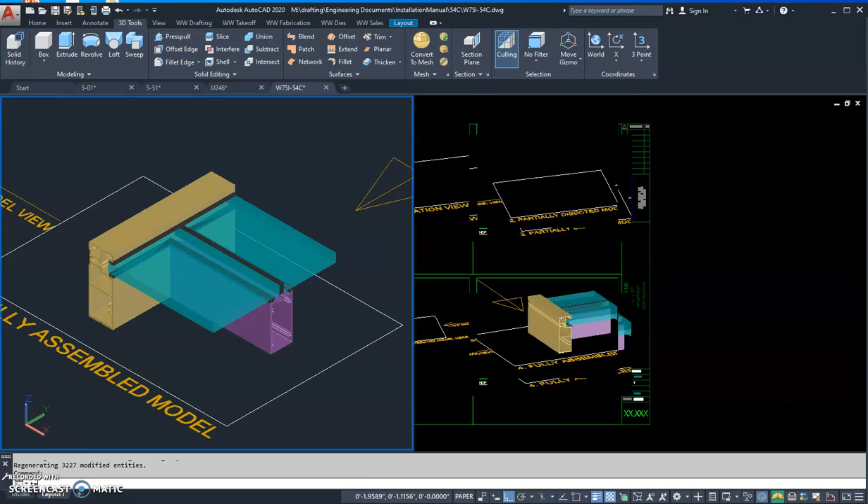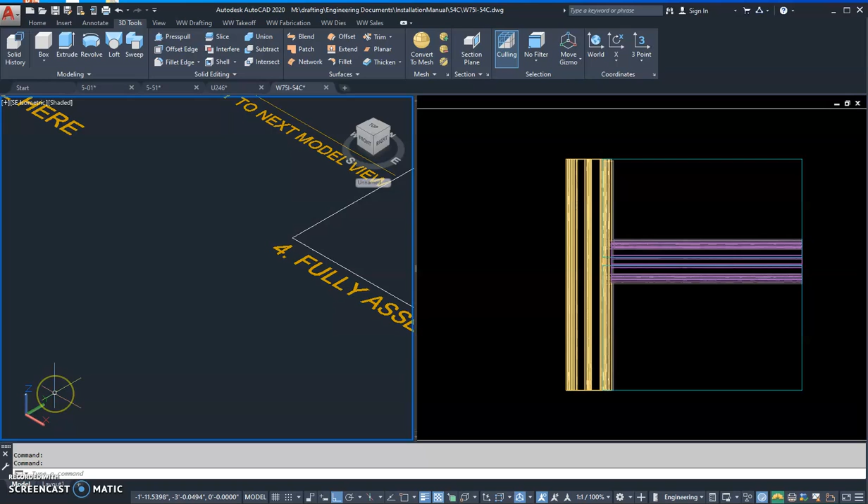Okay, so now we're going to go back to model space and start literally dissecting or taking apart this model piece by piece to show the different steps in the different viewports. So to do that, in the template we have a nice little reminder here to simply make sure your UCS is in the viewport plan, VPP setting. That makes it the easiest.

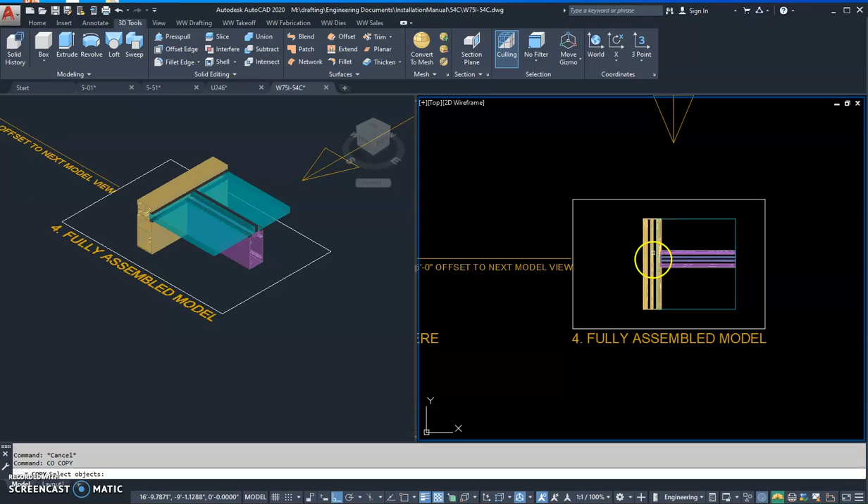And you're going to be doing 5-foot offsets to the next model. So that's our little trigger. So you could either copy from this isometric view or in the 2D view. I'm going to do it from the 2D view. I'm just going to copy everything we got here and make sure ortho is on, and I'm going to copy it over 5 feet. Okay, now I'm going to start working in this model here and start dissecting.

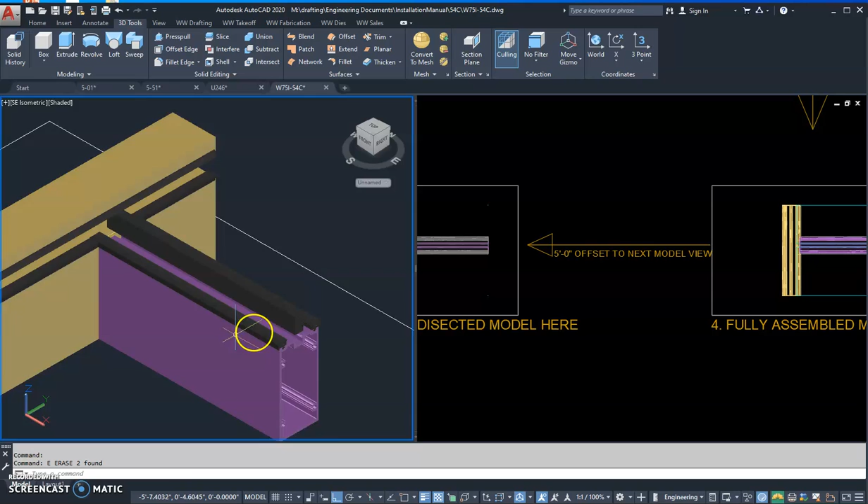So what were the last things that went in? Well, it was the glass. So we're going to remove the glass, and without the glass, we can't seal. So we're going to take off the sealant.

Okay, so this would be that second view. So you have to think to yourself, what am I showing here? What's the value of this view? Well, now you can see the logic of the gaskets, and we'll have to show the sealant work that needs to happen there. Okay, so now we have the second view.

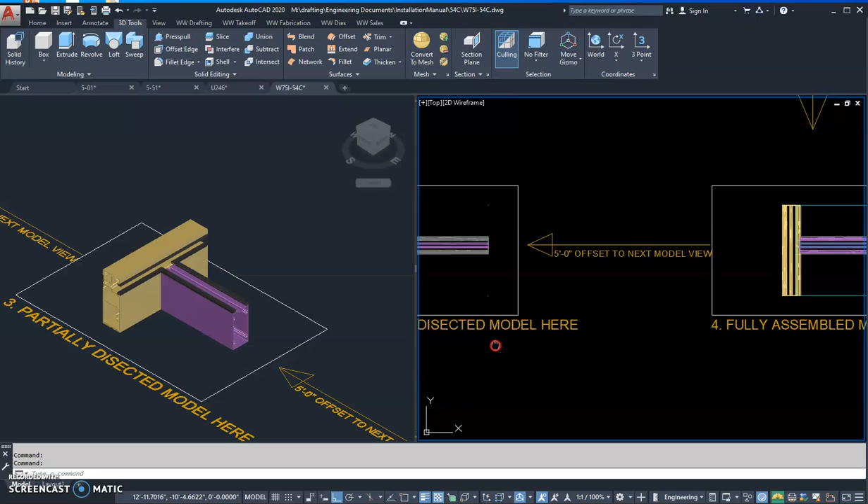We're going to copy this model again. So we're going to take a copy. Again, ortho on, 5 feet, go to the next view. And now we'll work in model number 2, and we're going to dissect some more.

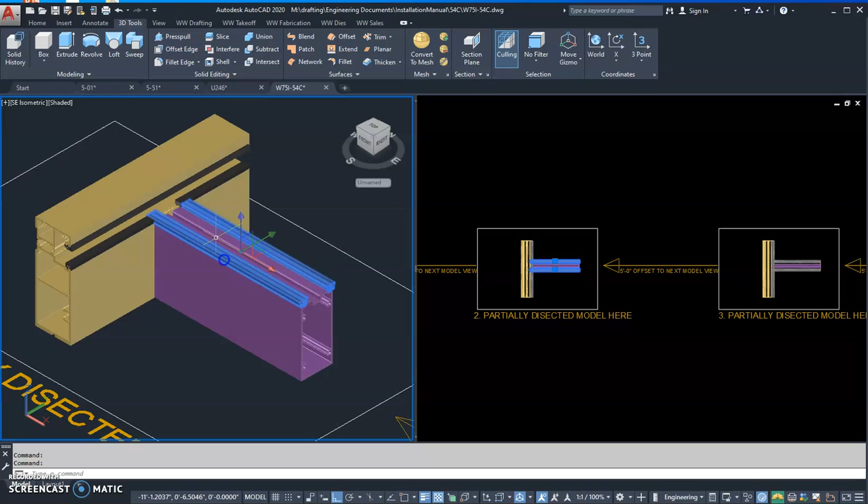So now we can wonder, well, what's the value going to be in this view? What would be the last steps the shop would have done? Well, let's remove these gaskets because those wouldn't be there. So this would be probably the next view that they see.

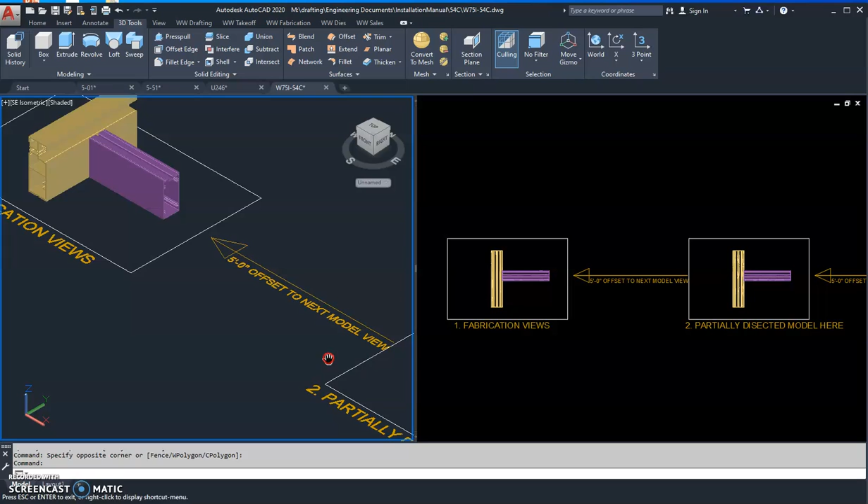Okay, now we're going to copy once more, and just because we like to be thorough, we're going to do one more view. I'm going to copy that over, and now we're in viewport 1 of the very first assembly view. What's going to happen? These parts will not be connected.

So I'm going to take this horizontal, and we typically go about 6 inches or so. Let's see how far that goes. Just to show it somewhat, like we call it an exploded view. And now you can see the two parts separated before they get assembled.

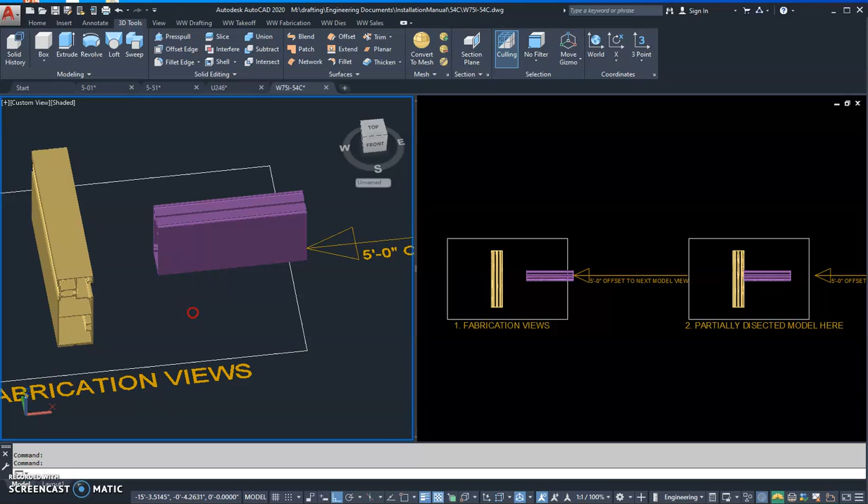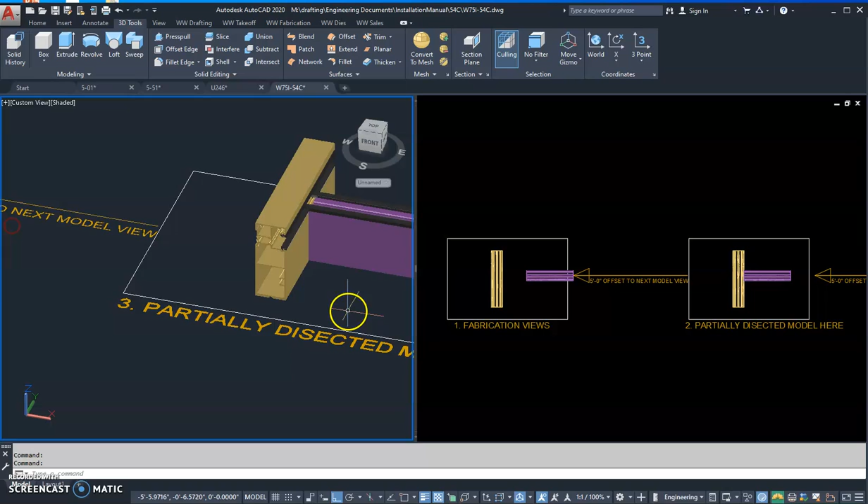Okay, so let's walk through the steps real quick and see if it makes sense with the views we have. So the parts and pieces will be cut in the shop and assembled first. Once they're assembled, the shop will see this. We could show the sealant work here that they would probably do. Then they would install gaskets, which they can see here, and we show them the logic of the gaskets. And then finally, they're going to add the glass. So that makes sense. Those are the sequence of events in this particular case.

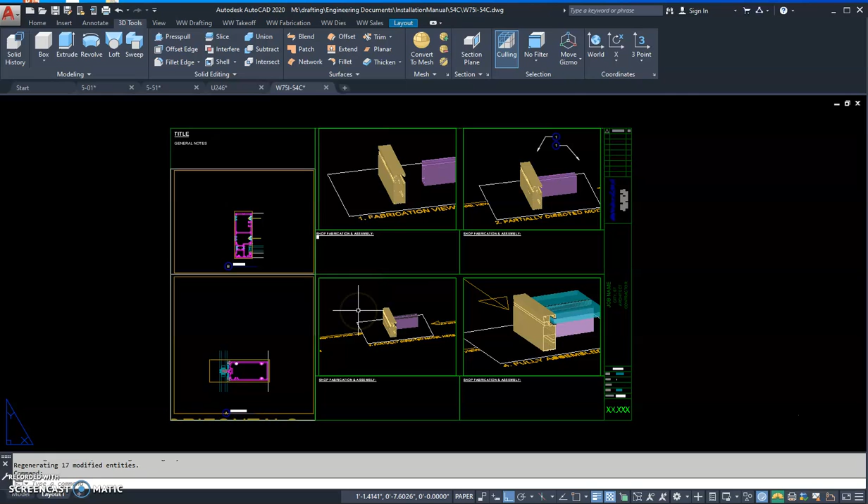So now we go back to Paperspace, and we just have to make the model look good and make sure the views are legible, easily seen what we're trying to depict here. So now that you're in Paperspace, you're going to be just doing some panning, zooming, and rotating of the model in the viewport itself.

So you simply double click into the viewport. Now this is active, only this one viewport is active. I can now pan or rotate or zoom and just affect this one viewport. So that's what you're going to do.

Just kind of zoom in and rotate to get the best view of this particular assembly that you're trying to show. So I'm just going to rotate a little bit more so you can see the shape of that horizontal a little bit more. And there we go.

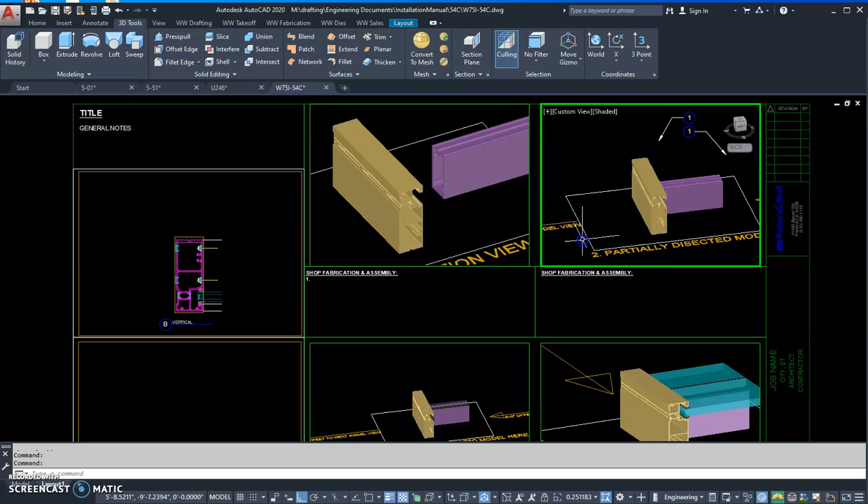And then it's kind of a best practice, if you can, to keep the views the same. But you can see now, if I rotate this view the same, we can't see the intersection. So this one might be better to be viewed this way, so we can show that intersection and the sealant work that needs to happen there.

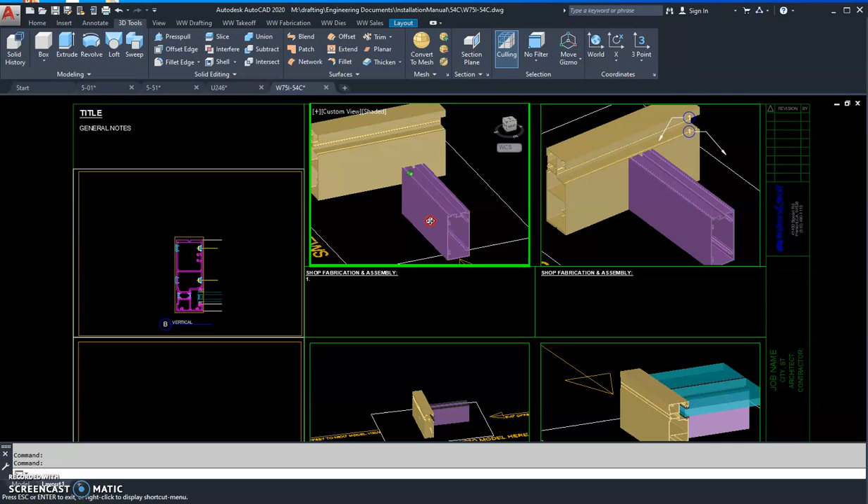So then I'm going to rotate this one as well, just so that they're kind of the same rotation, so it makes sense to the viewer what we're showing. That's just from experience in making these before.

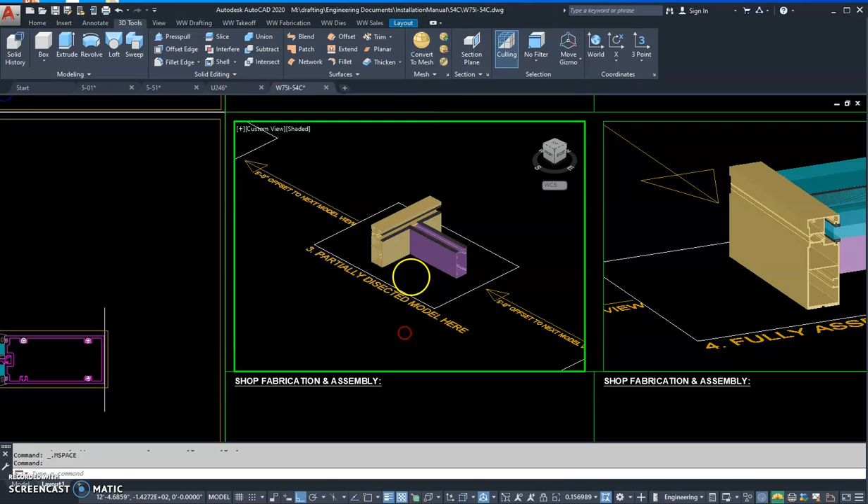Now I'm going to go to the third viewport. Sorry, I need to move my paper. So now I'm going to rotate the view to a similar angle. What am I trying to show here? It's this gasket, so I want to zoom in a little bit more so you can see the gasket logic a little bit better.

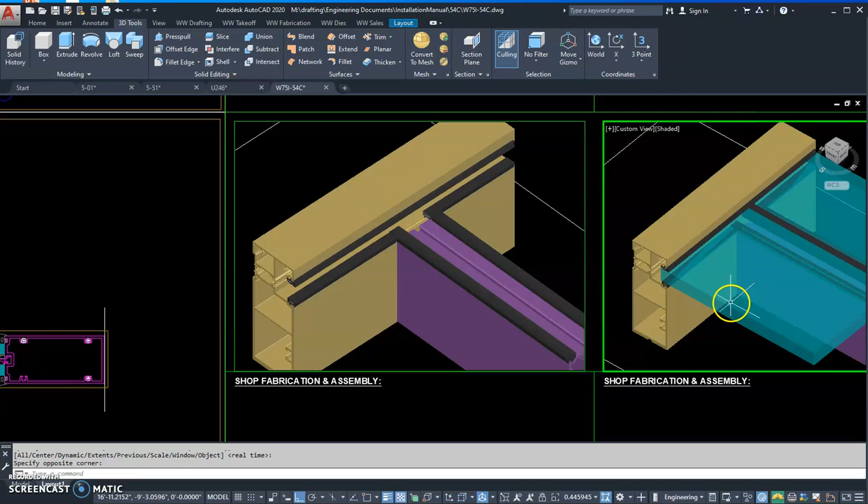And then the fourth and final view, the completed view of the unit laying on its back with the glass fully installed. I'm going to zoom in a little bit more to get a nice clean look of this finished intersection, and hit PS for paper space to get out of that viewport.

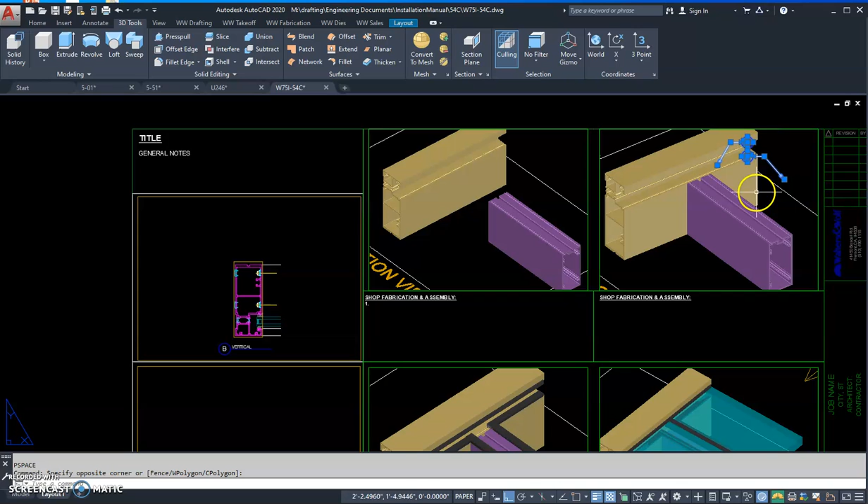So now you are about 75% there. All we need left to do is add the steps, and you can see we have these leader notes just floating in space here. That's just so you don't have to recreate them. You're going to have to move them and point to the correct item per view that go with the steps, and we're going to type in the steps based on what we got from the team.

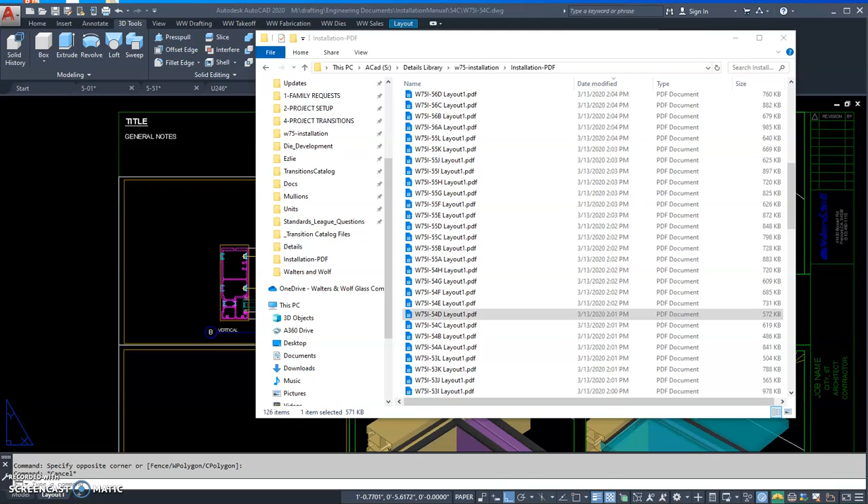So in this case, I got a markup from the team with steps for this particular transition. What I'm going to do is carry this over, type these up under each relevant view, and each of these have a number. I'm going to point to that object and edit the callout to have that number, so that it coordinates. I'll go ahead and do that, and then I'll be right back.

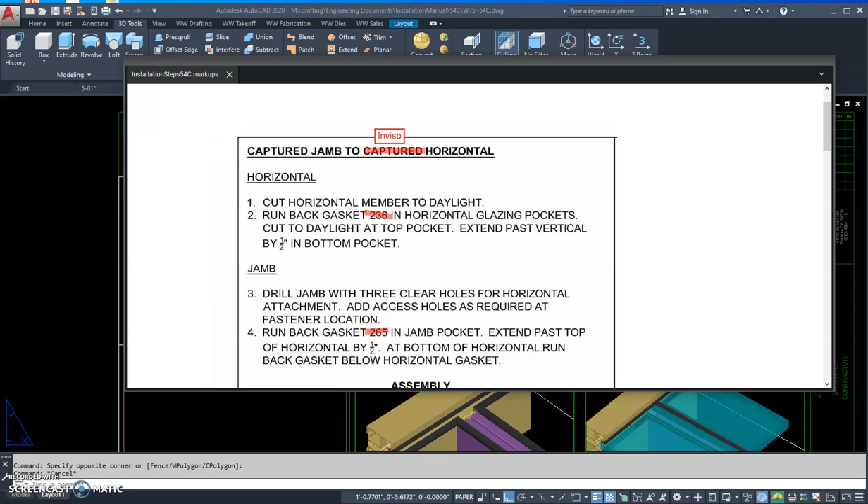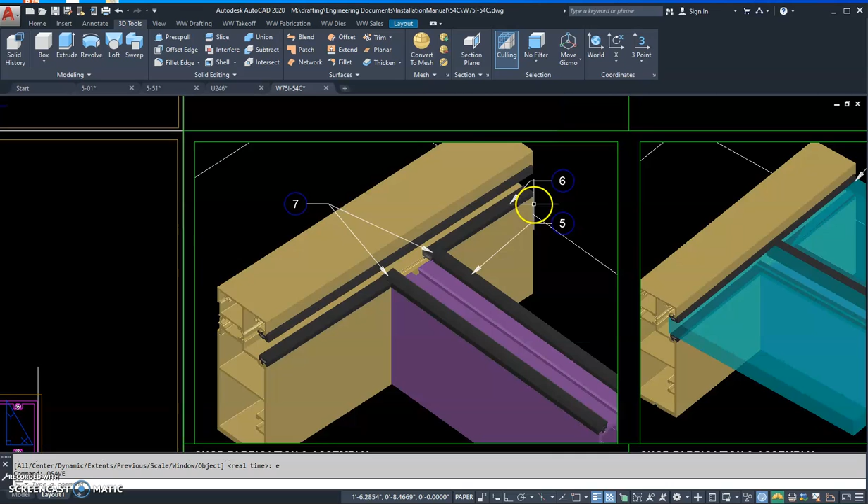Okay, so I have the steps typed in and updated the leaders to point to each coordinating item mentioned in the steps. One thing I did notice was that in the steps, the wedge gasket actually doesn't get installed until after the glass is installed. So that's something I'm going to correct in the model, but it's something we should look out for, to make sure our models are accurately depicting the steps and what is really going to be there. That's more accurate, because the wedge gasket won't be installed until here. That was just something I noticed as I was typing up the steps.

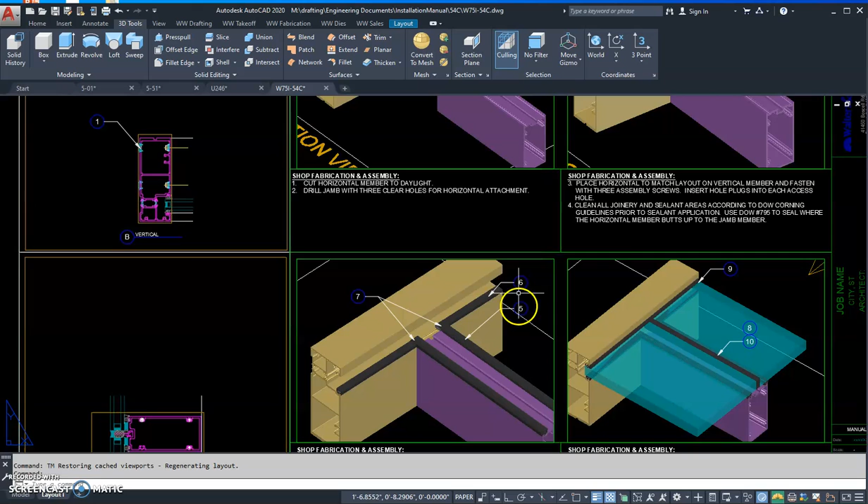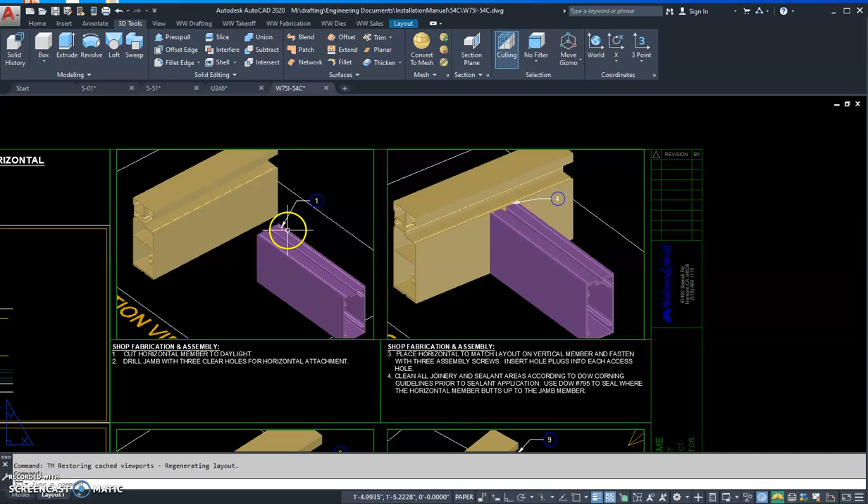And then I just pointed the leaders to each coordinating item. One rule of thumb is if you can get the leaders placed in line with each other, that's best, as well as trying to keep the leaders from laying on top of an object, which helps make it more legible if possible. Here I tried, but it's a little hard when they're close together like this, so it's just a practice for quality to try whenever possible to keep the notes nice, neat and legible, not on top of the objects if possible. Okay, so now we have this whole thing here.

We're almost done. The viewports here are a little small, so I'm going to double click and zoom in to make these details a little bigger, because they are the main event, so to speak, on this sheet. I'm going to move this note over here because I could not, for number 3, show the assembly screws in the 3D views looking at it this way. So the only way to see that would be from this view, so it's actually note number 3 and number 2.

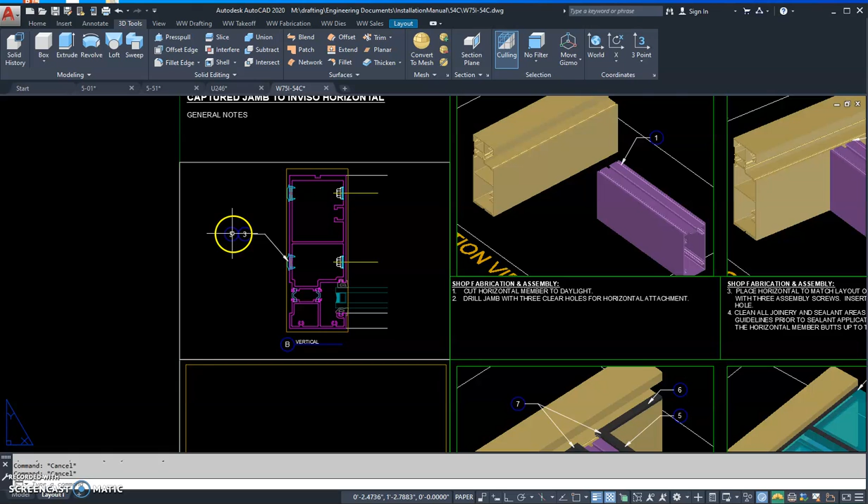So here I'm going to copy this note so I can have both callouts with one leader to keep it neat, and this one as well. I'm going to zoom in and make it a little bigger so it fills up that viewport. Okay, paper space, get out of that. I'm just going to move this up a little bit so it's a little neater inside the sheet.

Okay, so there we go. This is a completed sheet. From this point, what you would do is save this and then plot it to a PDF and have it reviewed by the team before it gets added to the installation manual. And that would be it.